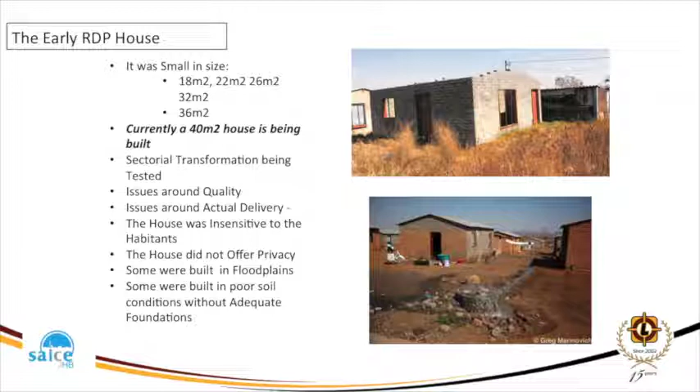Some of the houses were built in the floodplains. Some were built in poor soil conditions without adequate foundations. And this resulted in a very terrible expenditure in the years 2011 to 2013, where the government spent 2.1 billion to fix the houses.

NHBRC was quite instrumental in that. And this was an expenditure, an opportunity that was lost, that could have given other people houses.

These were some of the problems that were fixed: the ground problem, the services problem, the roads problem where no roads were built, a lot of flooding, contractors abandoning sites, and poor workmanship. These are some of the challenges that unfortunately are still out there, experienced by the people who have received these houses.

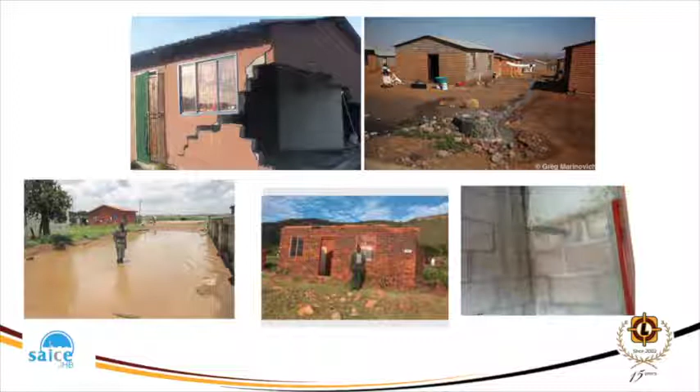We're saying some of the problem was that the clients don't have the knowledge, the technical know-how on the product they're dealing with. Housing is seen as a social response rather than a technical response.

There's issues around budget management, scope definition, lack of resources, lack of integrated planning, and in some projects the political will to make them good was not there. Wrong procurement practices, disregard to responsibility, and corruption played quite a serious role in that, where payments are done but there are no houses on the ground.

On the professional side, also our industry must take a little bit of a beating on this, because we allowed people that are non-technical to do projects that are technical in nature. So you find there's no expertise and the responsibility is not there.

Management of the project in terms of budget, quality and cost is not there. And also corruption, because people are not professional enough to do this project. The contractors - we have instances where teachers are appointed as contractors. They don't have expertise, they offer poor workmanship, lack of supervision, and also corruption.

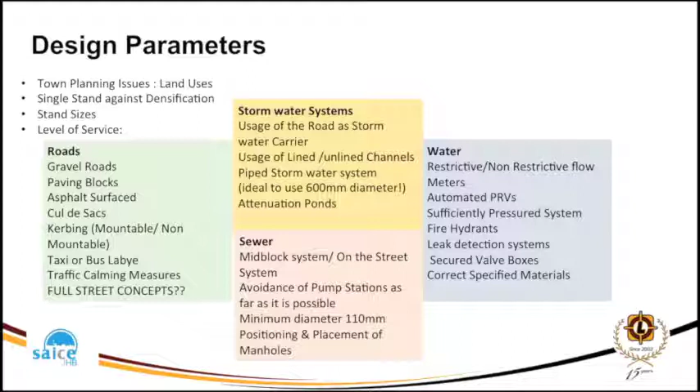On the electricity side, looking at overhead system or underground system. Cabling to the house - will it be overhead or underground? The installation of prepaid meters to ensure people pay for electricity, and mini subs - where are they positioned? The future things to consider now are voltaic or solar lighting, solar heating, heat pumps, and gas. It's interesting that Gauteng as a province is exploring the usage of gas for heating purposes. Other technological things - look at 4G, LTE, fiber, Wi-Fi.

Are we designing the RDP to be the RDP of the past, or do we need to respond to things that are coming in the future? Of course, these things cost money. This needs to be changed at the policy level as well, but this doesn't stop innovation.

We design our townships for residential usage with very little stands for businesses, or what the buzzword is, township business economy. And I see the doctor is here. So are we making provision for the spaza shops, hair salons, small-scale fabrication, steel, aluminium, motor mechanics?

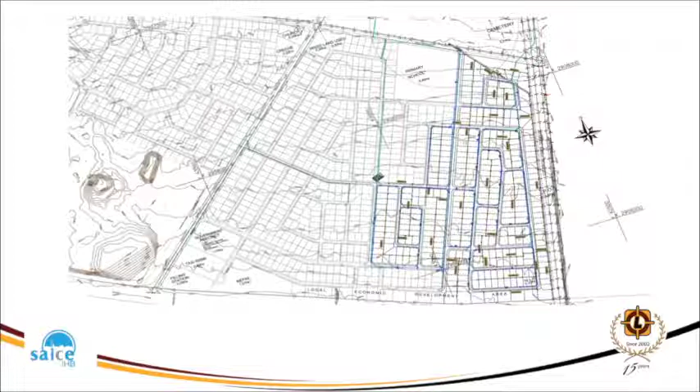The other restricting issues are with the level of service, where our road reserves sit at 10.5 meters. We need to put in a minimum road of 5 meter width, and suddenly we have stormwater, electricity, fire hydrants - there's a lot of congestion in the road reserve, which results in other things that are not intended for.

What else can I talk about? Oh yeah, the usage of the mid-block sewer system - ensuring that servitude is always clear of buildings or any disturbance that can take place there.

This layout shows the roads, as I was talking about, where you'd have very narrow ones. If you put walkways around this road, you still have to accommodate other services. We design for today's terms, but a person's life changes - people buy cars, people move upward in the economy, and then our services cannot cater for such things.

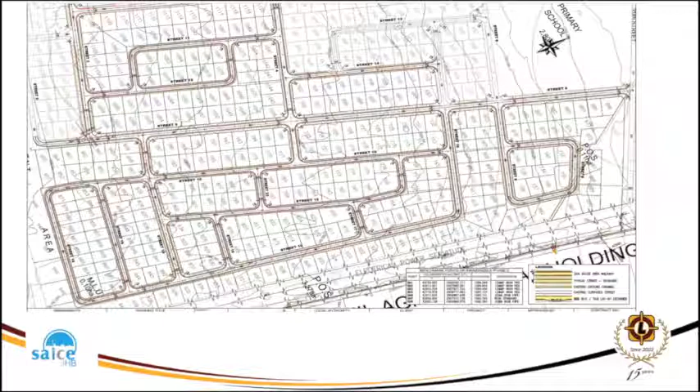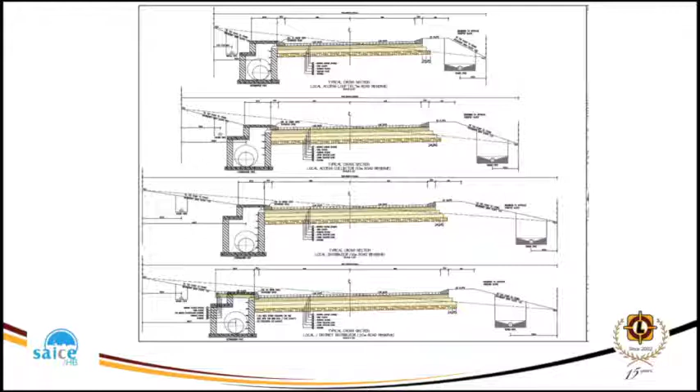Is our design, our services, responding to how this community is experiencing this? Obviously a lot of things can go wrong - hitting of pegs into the road, which later results in a spot for a pothole, adding additional maintenance on the road.

What we're talking about, the subsidy quantum for today - I'll share with you it's 102,000 just for the construction of the house. We're saying it dictates the type of product we give. It limits the innovation I was suggesting, and the level of service can be enhanced.

By mixed land usage. Currently the policy of government is to do this type of product, where there's what is called breaking new ground, which is a new site that needs to be built, or what is called finance-linked subsidy program, rental or social housing, bonded stock, and then to mix it with commercial and light industrial, to ensure people are not far from places of work.

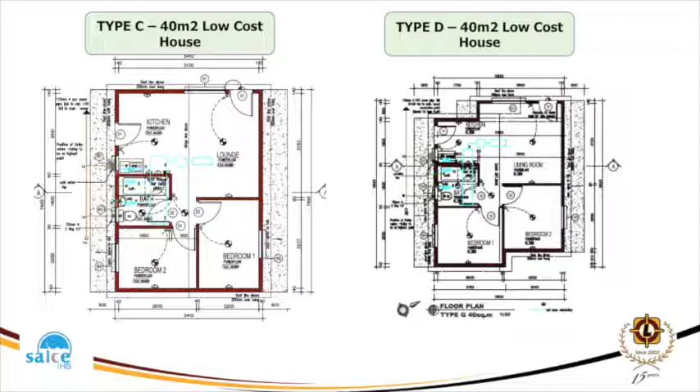If we go to how the houses look, we've looked at 4 typologies here. It's a 2-bedroom house.

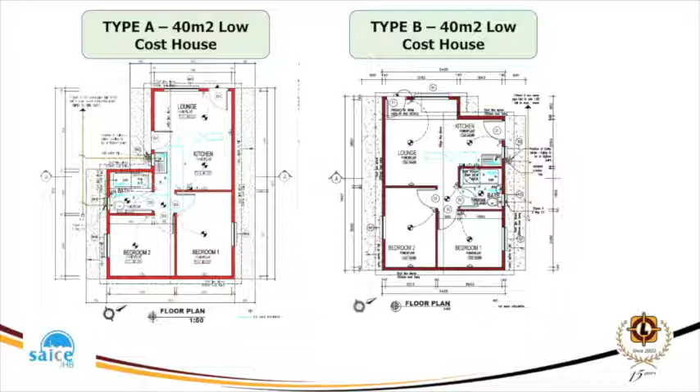The walls are built of 140 millimeter brick, a maxi brick. Inside it's also divided by a maxi brick. In the past it used to be brick on edge at 90 millimeter. This was not offering greater structural resistance, and also not offering that privacy.

And then the windows, really nice size windows on the street front, and it's got an 11 liter water cistern, power floated. The external walls are plastered and painted, and this rendering around the house gives it a really nice look. The roof is concrete tiles with insulation. It's got electrical wiring, 1 plug per room, with a DB board, and there's a stove isolator.

And what we've seen is each provincial department will insist on certain things. In Gauteng they will put in a 100 liter high pressure solar geyser as part of the amount. Other provinces, like Free State, will increase the size of the house.

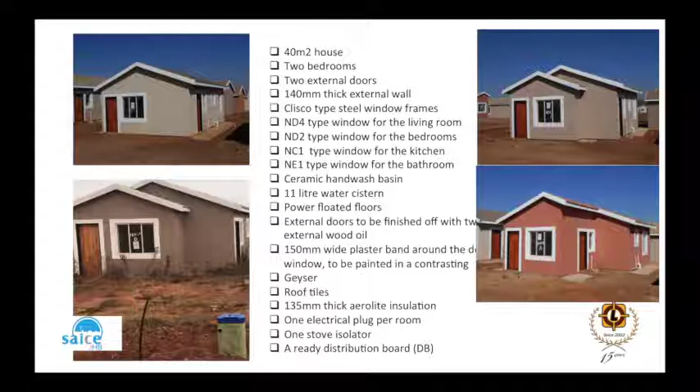It's a really beautiful house that is available also on the open market. You can buy this house from developers like Cosmos. In towns that they develop, it's slightly bigger, about 45 square meters for about 450. And because it's enhanced, we build it with surfaced roads. You really get a very nice neighborhood that is created.

This is a project that we are busy with in Nellmapius near Mamelodi. So the quality of the product being rolled out there, it's really a marvel to stay in this neighborhood. And in fact, we've seen some of the people who have already moved into the houses taking pride in making sure the garden is beautiful, with some of them putting nice plants around it.

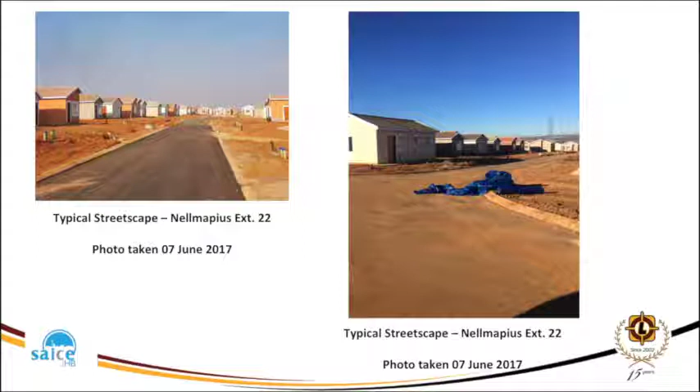This is just installation of services, a project that we are doing in the Vaal Marina. This was a very difficult site because we had to get buy-in from the community that is there.

You know, they say in Vaal Marina there are more boats than anywhere in the sea. So we had to get buy-in that as you travel up the road towards the Vaal Marina dam, it shouldn't be an eyesore. And really our client was very accommodating in making sure we give a good product.

What we've done there is a ring road, services are installed, with a paved walkway on each side, a bus bay there and also on that side. So the idea is that the developers who come to build the stands will find the road already done, and it will give a different outlook. It's such that even the municipality is actually upgrading this road.

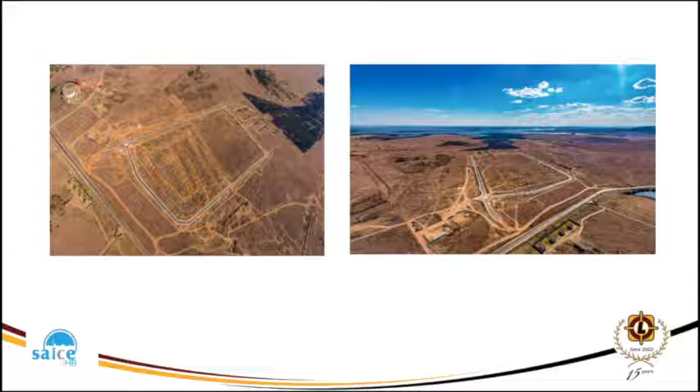So, okay, that was the previous site that we are still busy with. We should be off-site by August. Yeah, there's still a lot of work on this side.